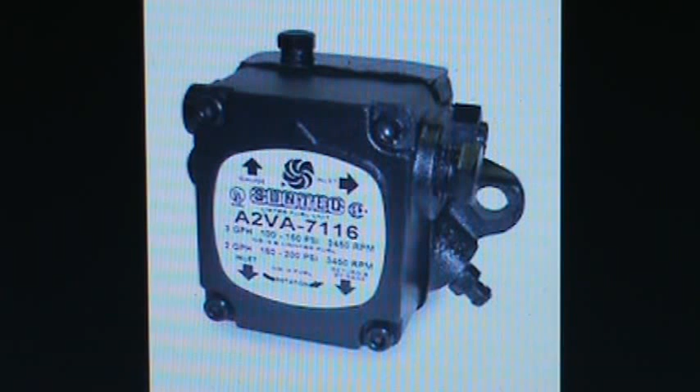This video is intended for advanced users. We will discuss controls, fuel pumps, service practices, troubleshooting, zone controls. Today I want to talk and start on fuel pumps.

This particular pump here is a Suntec A2VA 7116. It's probably the most common single stage fuel pump that you'll run into. The newer generation is the clean cut with the solenoid on top. We'll get into that one a little later. But this one here I want to go over because it's very, very common.

There is a strainer inside. This is the strainer cover that you're looking at here. There's 4 bolts, one on each corner, of course, and the strainer should be replaced at least once a year, or taken out and serviced, cleaned, new gasket installed.

Okay, so I opened up to the spec page. I want to thank Suntec Fuel Pumps. This is their manual for this particular pump, and I got this right off the line. This is their PDF file for their pump, A2VA 7116 pump.

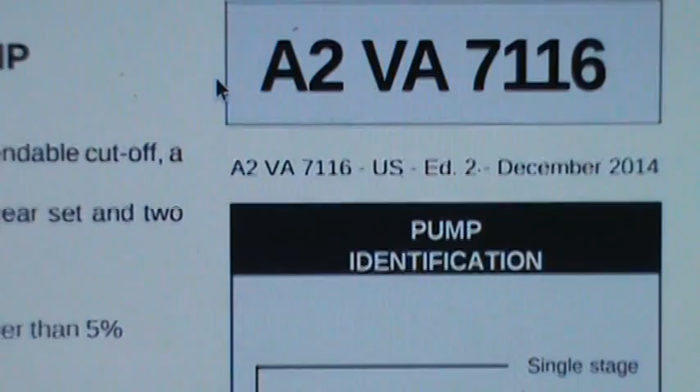Now, first thing I want to do is the pump identification. If we scroll down here and we look, we've got the pump identification, and there's the A2VA. So the first letter A, that signifies it's a single stage pump. If it was a 2-stage pump, there would be the letter B there. So A is single, B is 2-stage.

Motor RPM 3450, very important because there's 1725 RPM burner motors. Old ones, you don't see them anymore, but you want to make sure you get the proper speed, or the valve will not open inside, and with the older pumps, you won't get any fuel coming out of them. Is one scenario. You just can't run at the wrong speed.

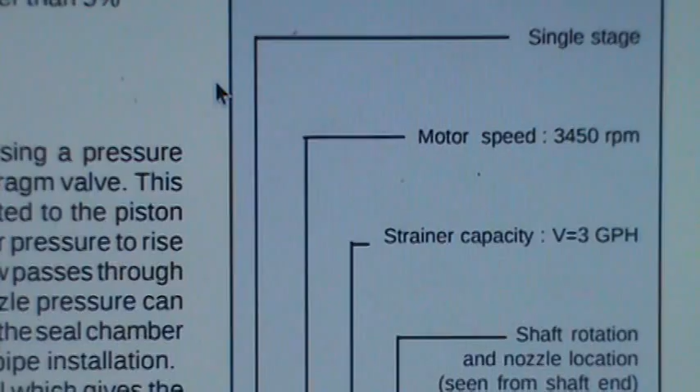That's kind of obvious. All right, then the strainer capacity, that's signified by the V. So strainer capacity V equals 3 gallons per hour. So on this particular pump, the strainer capacity is 3 GPH, 3 gallons per hour. So the maximum nozzle that you can run in that at 100 psi is 3 gallons. That would be your maximum. And I really don't recommend maxing out a fuel pump.

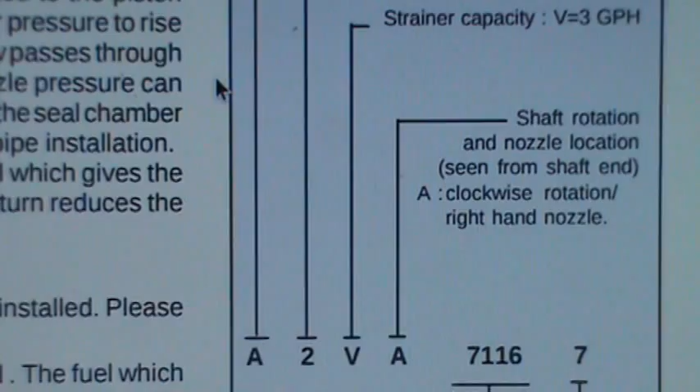The last A there, if you see, shaft rotation and nozzle location seen from shaft end. So A would mean a clockwise rotation, right hand nozzle. Whenever you're looking, this is kind of elementary, but just in case you don't know that out here, whenever you're looking at motors, electrical motors, or you're looking at fuel pumps, and you're trying to determine the shaft rotation, you always look at the shaft end first.

So if you hold the motor up in your hand or the fuel pump, look at the shaft. If the shaft turns right, then it's a clockwise rotation, and obviously if it turns left, it would be a counterclockwise rotation. So motors and pumps always go by the shaft end.

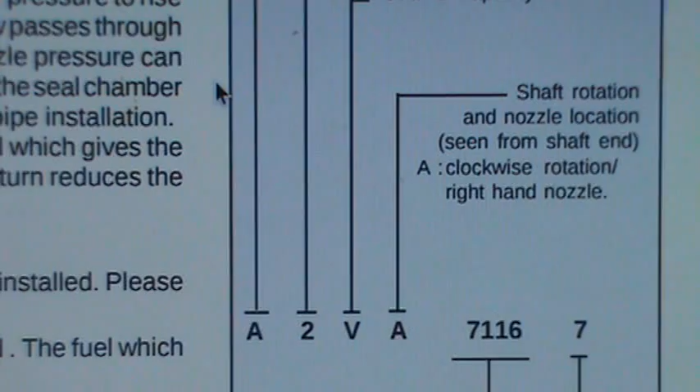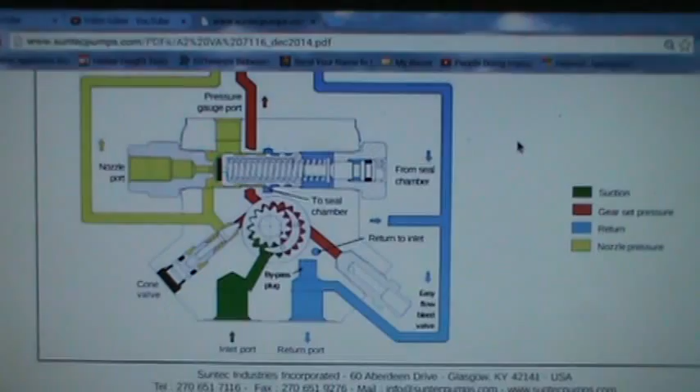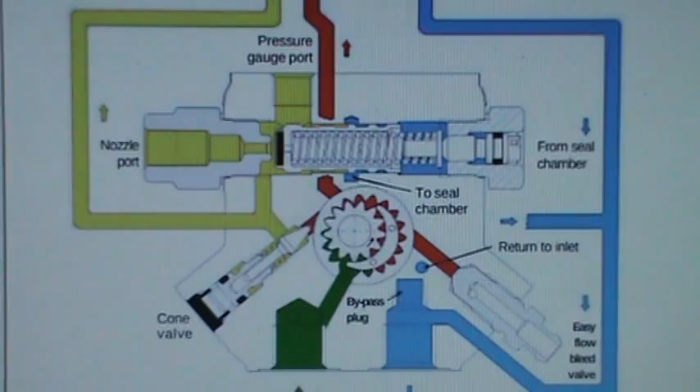Now let me zoom out here a little bit so we can see this diagram. And what this is, is the internal workings of the fuel pump. And I'll zoom this in. Again, this is a diagram, a PDF drawing from Suntec, their website. So they drew this drawing, I did not. If I can get it all in here.

Okay, I know this is really kind of hard to see, but let me go over the scale a little bit with you. Over here in the key section, the green is the suction. The gear set pressure, so pressurized oil will be the red. The blue is the return going back to the tank, and the yellow is the nozzle pressure.

Alright, this is the internal working of this particular Suntec fuel pump, the single stage. Inside you have a gear set and an inlet port. The green's inlet, the blue is the return port. You have a gear set that pulls in, creates a low pressure, pulls in fuel, builds that pressure up to 100 psi, 140 psi, which is common now.

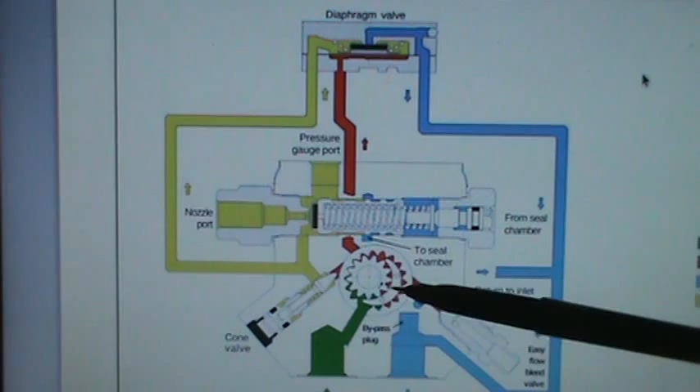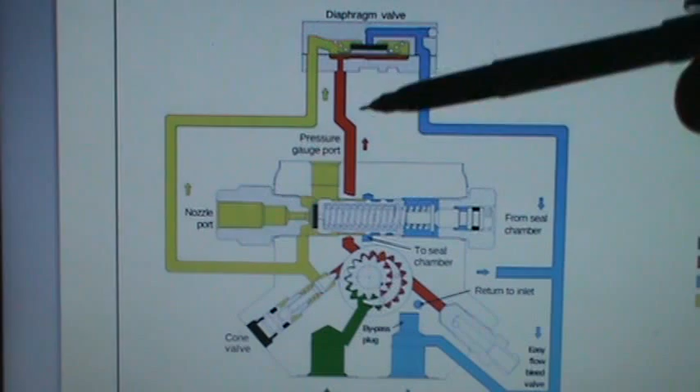You have cone valves inside. You have some diaphragms up at the top here. You have the nozzle port here. This is where your nozzle connection would be. Then you have, over here, your bleed valve, which is right here. We have a bleed valve over here, which is your purge valve, which is also tied in to the return port from up here. And you have a way to set the pump pressure with a spring.

So when the fuel oil overcomes the pressure of the spring, it allows it to flow out through the nozzle. There's a fuel cutoff valve inside the fuel pump, and its design and purpose is for those few split seconds, however long it is, for the pump to get up to speed and for the pump to wind down.

When the motor starts, it doesn't start instantaneously. In our mind, in our lifetime frame, it does, but if we slow that down, we can see that it takes time. The motor takes time to get up to speed, and vice versa when it's shutting down.

At those two points, if we did not have some way to shut off the oil flow, we'd have lower pressures, bad atomization if any—more like big droplets squirting like a squirt gun into the fuel. It would not mix with enough air. It would be a very rich condition, and you'd get a lot of sooting.

So to prevent that, in the older pumps they have what's called a fuel cutoff. It's basically a valve where the pump has to come up to pressure, or in some older pumps up to speed, before this valve would open and allow the fuel oil to be sprayed into the combustion chamber out through the nozzle.

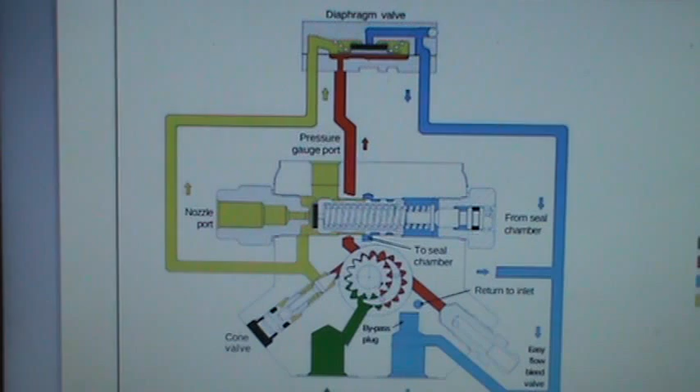If this cutoff is bad, you get what I mentioned before—this winding down, this squirt gun action, which creates a lot of soot, a lot of smoke, and plugs things up. There's a test you can do with your fuel gauges, and I'll show you how to do that later when we put the gauges on, to determine if the cutoff is good or bad.

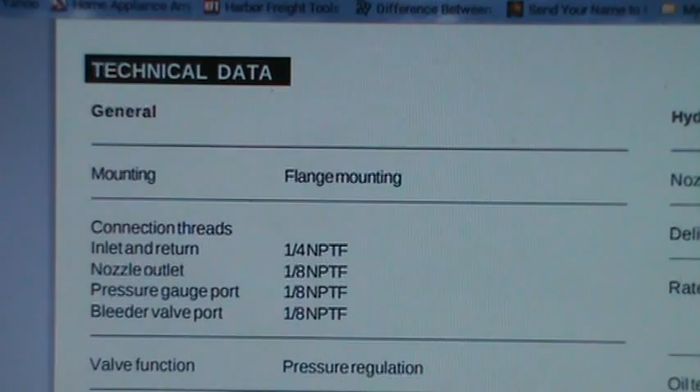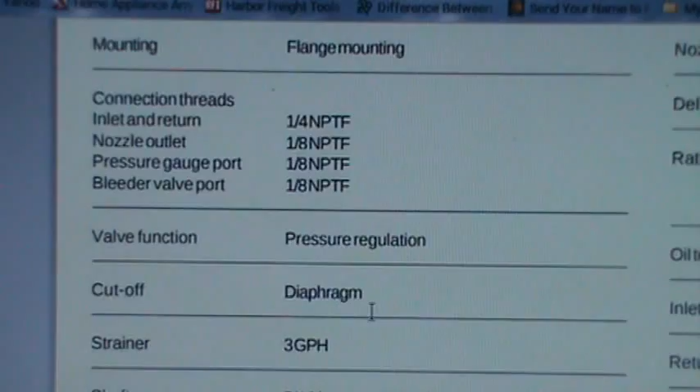Just real quickly, some of the technical data: here's the pipe sizing, the nozzle sizing, which we won't really get into—good 1/4 inch threads, 1/8 inch threads, pipe threads. The strainer, as I was telling you, is a 3-gallon strainer, you can see right here. The shaft is 5/16. This is just the instruction manual that comes with it.

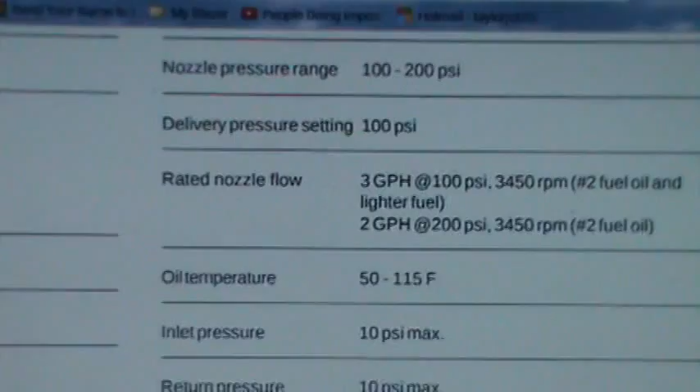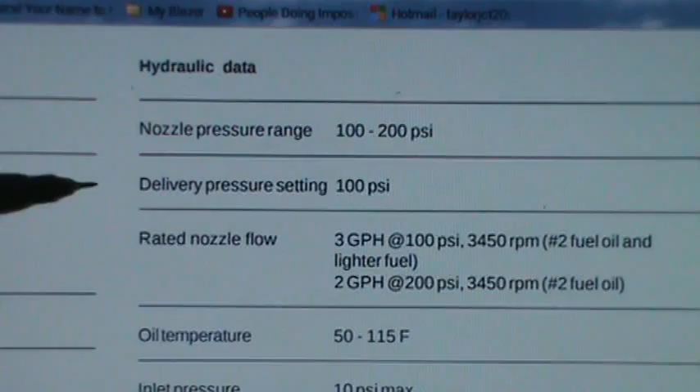If we look over on this side, I'll put my camera over so you can see, and we'll scroll down. Okay, the nozzle pressure in this range for this particular pump is between 100 and 200 psi. You can see right up at the top—the delivery pressure is 100 psi, so this pump is set from the factory at 100 psi.

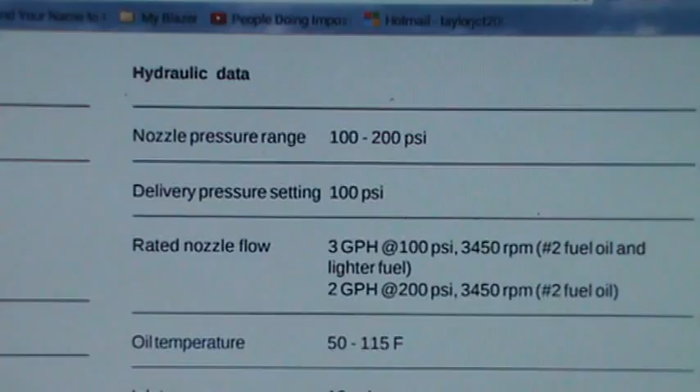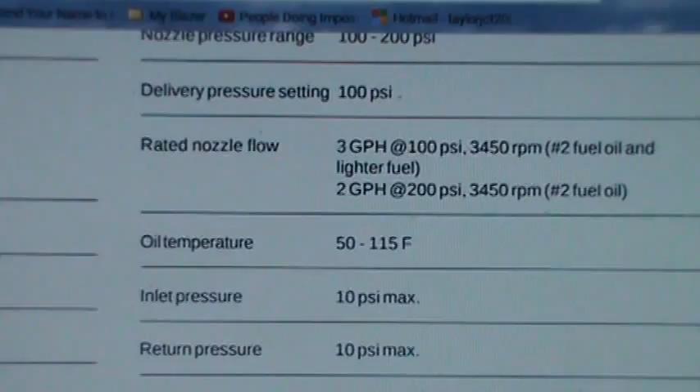This is your flow rate: 3 gallons per hour at 100 psi at 3450 RPM with number 2 fuel oil. If you increase your pump pressure to 200, your gallons per hour drops down to 2. You have your oil temperature there, minimum to max, 50 to 115 degrees Fahrenheit.

Now inlet pressure is 10 psi max, return pressure is 10 psi max. The reason for that, and per code too, is you're not supposed to install any type of valves on the return lines. You see it all the time—there's check valves. Sometimes if you don't, you get a free flow, and when you take your cover off, oil just pours in, and that's not a good thing either.

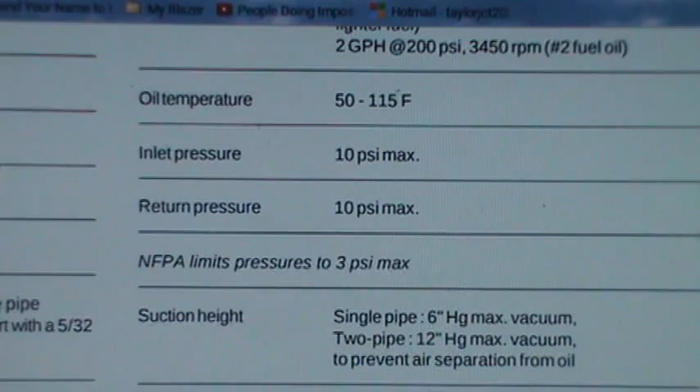The problem is that if the check valve or the return line should plug up on a 2-pipe system, or you leave a valve off—say a Firematic, you work on it, you forgot to open it after you serviced it—the inlet pressure here is only 10 psi, and you have a shaft seal in there. At that pressure, or slightly above it, the oil will leak out of that shaft seal into the burner housing, and then the fan will pick it up and blow it everywhere, or it'll leak all onto the floor.

In some cases, if the oil tank is outside above ground and the burner is actually below the oil tank, it's good to put an oil safety valve, or OSV, installed inline right at the burner. The reason for that is the weight of the oil itself cannot flow down through into the pipe, so if you have a busted line, leaky valve, or leaky shaft seal, the oil wouldn't gravity feed down.

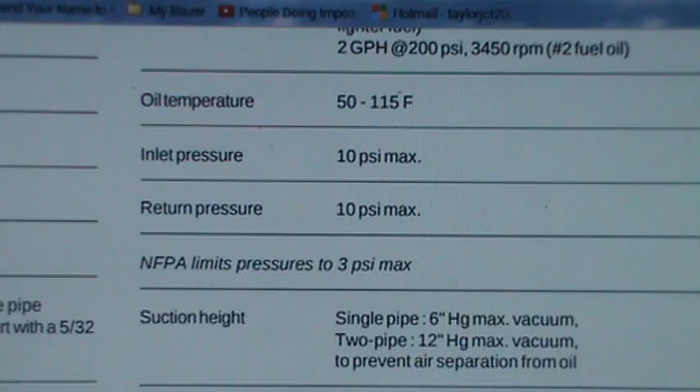It takes a slight suction from the fuel pump to open this valve to allow the oil to flow. It's an OSV valve, so anywhere the tank puts pressure on the burner from the fuel oil, you should always have an oil safety valve.

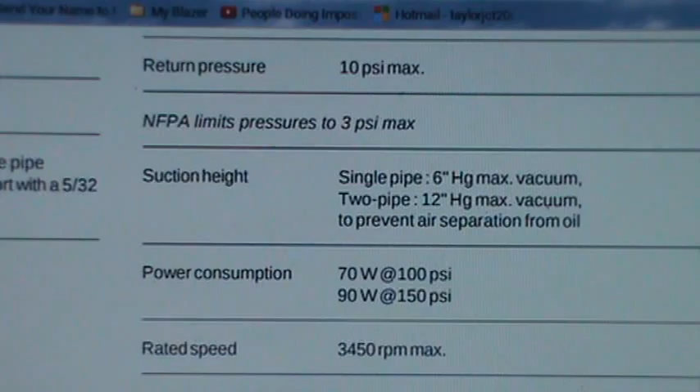Now, single pipe suction height, here we go. Very important: single pipe, 6 inches of vacuum. Two pipe system, 12 inches of vacuum, to prevent air separation from oil.

That's called cavitation. Basically, cavitation is when there are small microscopic droplets of air in the fuel oil, in liquids, from just the air pressure alone here on the surface of the earth. So when we start putting those liquids under a vacuum, that air expands tremendously and wants to come out. If you pull too hard, say roughly 15 inches of vacuum...

You're going to start cavitating. You're pulling that oil under a vacuum, and the air molecules inside those little voids are going to expand, and it looks like you're pulling the oil apart. If you're not trained for this, it looks like you've got a leaky oil system somewhere and you're pulling air in through the supply line to the burner. But in fact, you're actually pulling apart the air that's trapped inside the oil, and that's because there's too much vacuum. A plugged oil line, plugged filter, things like that can cause that.

So we'll get into that. I'll show you that in a video when we do a live demonstration.

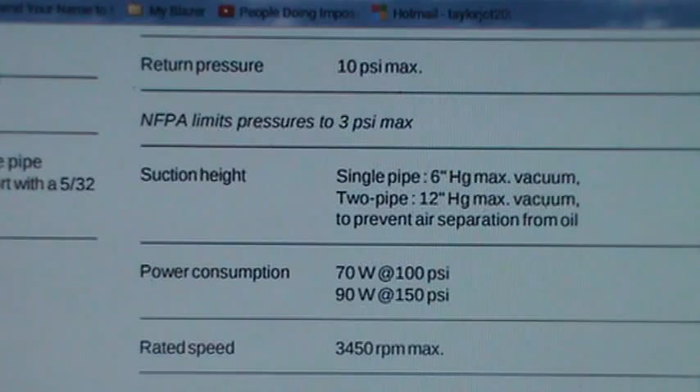I mentioned this pump before. This is the Suntec A2VA 3006. What they've done is eliminate the fuel cutoff inside the fuel pump and gone with an electrical solenoid that's powered by the primary control. By doing that, they can do pre-purge and post-purge, and actually run the unit without spraying any fuel. There are a lot of advantages to that. It's pretty much a single stage pump, just like the previous pump, but with this feature added. Let me go to the specs on this.

Here is the online service manual, or instruction manual, for model A3000 and B4000, the single stage and two-stage fuel units that you can get from Suntec online.

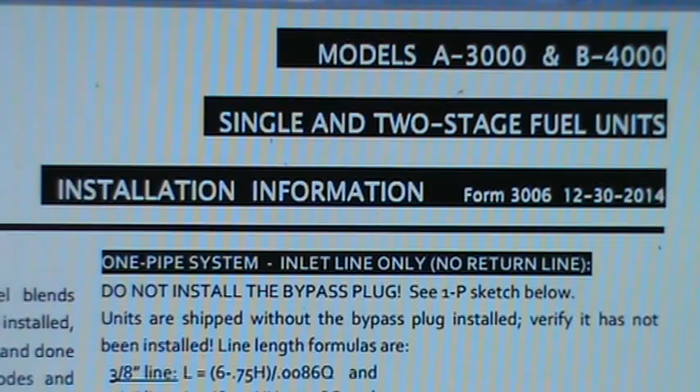Here in the instructions they give you the formula to figure out the length of lines. They say L is the length, H is the head, and Q is the firing rate. They give you the formulas to size the oil lines in the fuel pump properly. In the notes, it says elbows, valves, fittings, and filters will reduce line length because they add restriction.

The very last note is kind of interesting: it is recommended to avoid 3/8 lines where feasible. That's interesting, I understand that — obviously you can get more oil supply under less vacuum with a larger line, but 3/8 has been standard for many years.

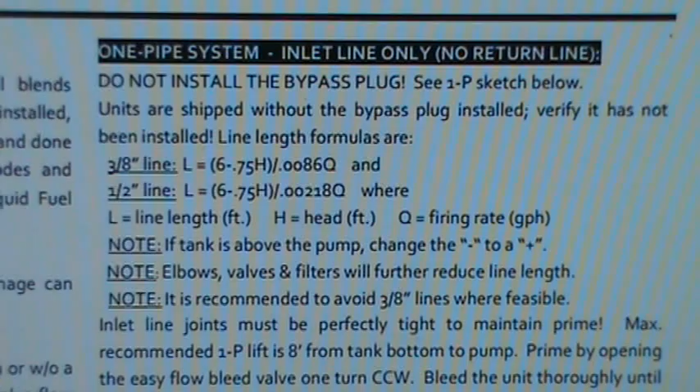If you read here, the inlet line joints must be... let me pull the camera down a little so you can see. It says the inlet line joints must be perfectly tight to maintain prime — that's obvious. Maximum recommended lift is 8 feet from tank bottom to pump.

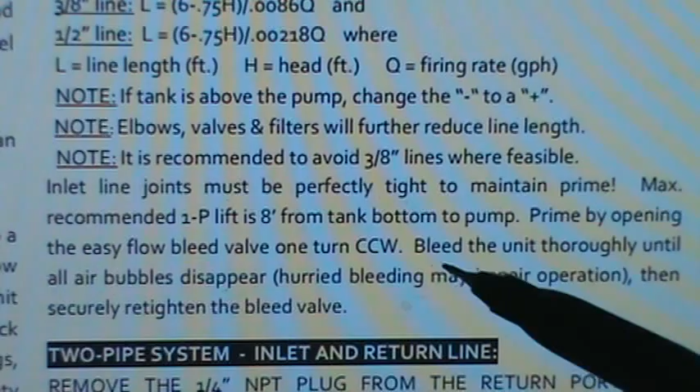Good information to remember: maximum lift, this is for a single stage, one pipe, no return line — maximum lift is 8 feet from tank bottom to pump. Prime by opening the bleeder, bleed the unit until you get the air bubbles out.

All fuel units come through with a bypass plug not installed — that's for a single pipe system. Single pipe system, you have to purge it. If air gets into the pump, it will just stop pumping. You have to manually bleed it, like brakes on a truck. Two pipe system, one of the advantages is that it will self-prime.

As long as it will prime and fire during the time limit of the safety before it locks out. That's why on a lot of new controls you'll see it retry, because they'll give it a second try for ignition. So by that time, hopefully, if it's a long run or troublesome, you might get the oil to the burner and have it fire and not lock out, so you won't lose your heat.

Two pipe system, you need a bypass plug installed inside the fuel pump. These instructions tell you how to do that — you must put it in the return port on the bottom of the fuel pump, which I'll show you later. There's a plug that you must take out, and a small Allen screw plug, in this case a 1/16 bypass plug, with a 5/32 Allen wrench head. You stick that inside, tighten it down, and that blocks off the bypass port internally inside the pump. I'll go over that in detail a little later.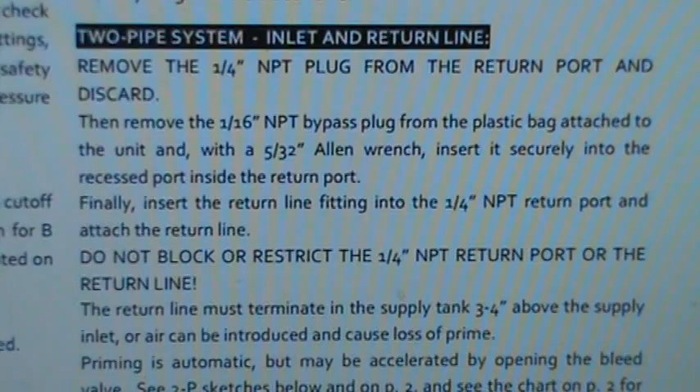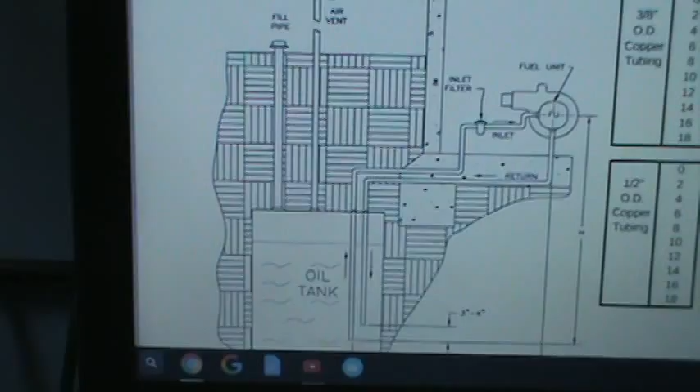Okay, here someone took the time to draw us a nice drawing, and this is in the instructions. If you look up there, it's a two pipe hookup, inside or outside fuel tank, fuel unit above tank — in other words, a standard in-ground installation, fuel unit installation. So here you see the tank, your fill pipe, your vent pipe, your two lines. And if you notice here on the schematic, let me get down and zoom in a little bit.

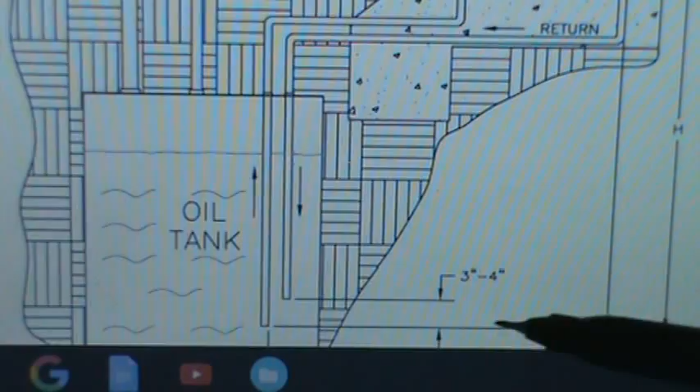If you see right here, that 3 to 4 inches? Right there. What that means is they want the supply line, if you follow it down from the burner, which is the outside one, to be 3 to 4 inches longer than the return line. See the arrows right here? So supply is longer by 3 to 4 inches. That's to help prevent air bubbles getting caught and getting in, and losing your prime in your burner. That's what that's for, it tells you that in the instructions.

Okay, let's look at this chart first. This is the 3/8 copper tubing, the inlet tubing size, so 3/8 copper coming in. This is your lift and height, so your vertical lift, you pick however many feet that might be. Then if you look up here, this is a single pump, Model A, single stage.

Over here's two stage, Model B. Here's your two different RPMs, the 1725 and 3450 pumps. Then you have the gear set, which is either 3 gallons per hour or the 7 gallon per hour pump. So you have to find what column we fall in. In a typical residential setup, you order a boiler, a 3-section boiler, your standard boiler that you buy at your supply house, it's going to have a single stage, 3 gallon per hour pump, and it's going to be a 3450 nowadays. You won't find 1725 pretty much, those are just old burners. You won't find them anymore unless it's old burners. To my knowledge, nobody makes them any longer.

So we're at a single stage pump. We're in our basement downstairs. We're at 3450 RPM, and we're also a 3 gallon gear set. So with this chart, and we're running 3/8 oil lines, we're going to be using this chart right here. See how that works? All right, and then our total lift.

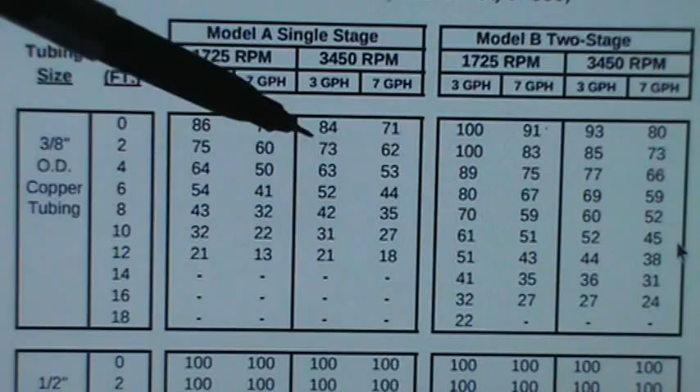Then we go over to our section where our pump is, 3450, 3 gallon, and we go down to 10, that column intersects there. It says our maximum line there and back is 31 feet. So that's only 15 feet to the tank and back again, if you're lifting 10 feet in the air.

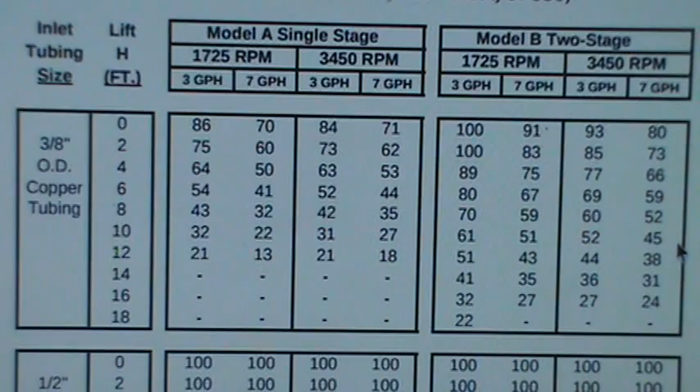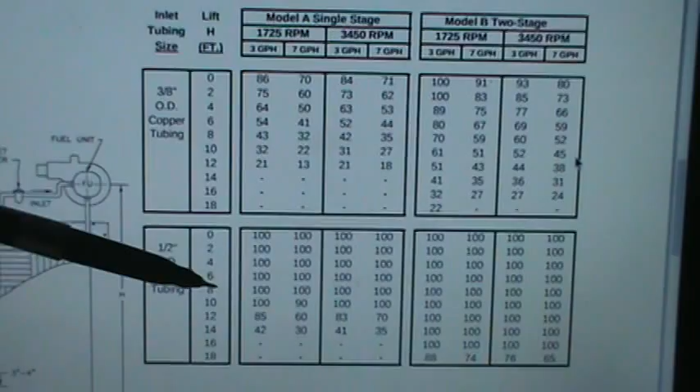Now you can put that into perspective with some of the installations that you've run into. Now I kind of zoomed out, and I know it's hard to see, but over here it's kind of the same chart that we just looked at, but for 1/2 inch copper tubing. So here's your feet, just like the other ones. But if you notice over here, most of these are hundreds, almost all of them, until you get way down here, until you're pulling a really, really high lift, because 12 inches of vacuum, you're getting really, really high in vacuum.

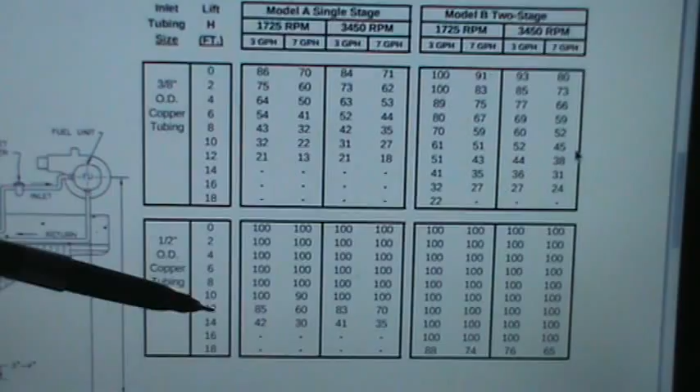Because basically, on a single pipe system, you only want to pull about 6 inches of vacuum on a single pipe, single stage pump. 6 inches is about maximum. A 2-pipe system with the same pump, they recommend about a maximum of 12 inches of vacuum. But if you increase to a 1/2 inch line, look at the line lengths, the difference.

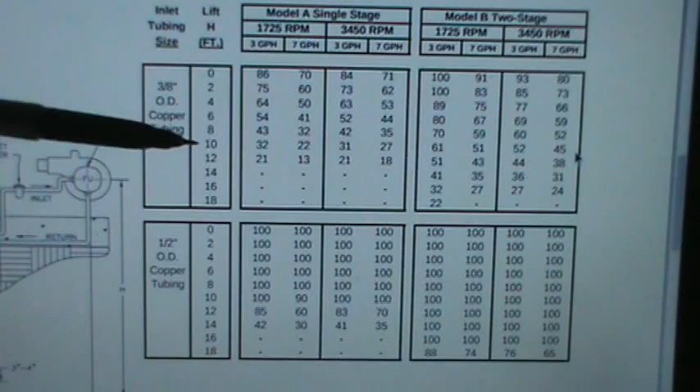For instance, say we're coming out, do the same scenario. We got 10 feet of vertical lift. We go over to our pump that we were using, maximum is 31 feet, remember? So now the same scenario, 10 feet here, same pump, we're at 100 feet now. So what a difference, just by increasing that from 3/8 to 1/2 inch oil line, makes a huge difference.

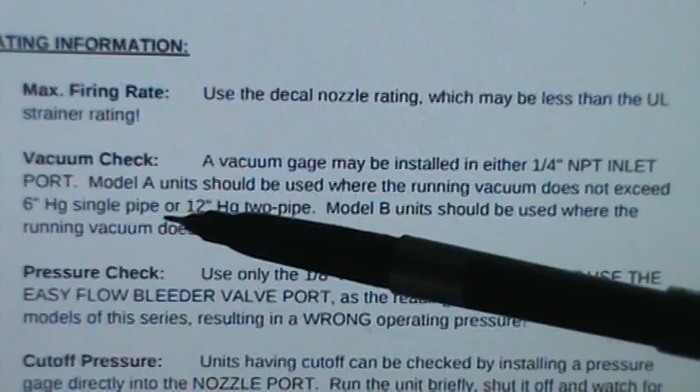To elaborate a little bit on what I just said about the rule of thumb on vacuums and the maximum amount of vacuum, here it says in the operating instructions under vacuum check: a vacuum gauge may be installed in either the 1/4 inch NPT inlet port, which is another inlet on the bottom of the pump, you can put a vacuum gauge there. Model A units, which are the single stage units we've been talking about, should be used where the running vacuum does not exceed 6 inches single pipe, or 12 inches 2-pipe.

Model B units, 2-stage units, should be used where the running vacuum does not exceed 17 inches. All right, there's our guideline.

That is so important. So when we go to that service call where a customer complains the oil burner will not continue to run and everything tests out fine, the ignition transformer looks great, the primary control looks great, maybe you've already changed them because you weren't sure - all you've got to do is throw a vacuum test on that and see what you're pulling for a vacuum.

If it's a single stage pump, and know what your pump is, of course, and you're pulling more or greater than 6 inches of vacuum, again account for age of the pump as well. An older pump won't be as good, it'll be worn out some. But if you're pulling 6 inches or greater, that could be a problem right there. I'm not saying it is your problem, but it very well could be.

Now I have seen single stage pumps, that one single pipe, that would pull 12 inches of vacuum, and they did it for years - they're very reliable pumps. It depends upon the integrity of the pump, how it's been treated over the course of the year, and how well it's been maintained. If it's never run dry and overheated, and you've never had contaminants in the oil to eat away at it, then that pump will last a long time. Assuming water hasn't gotten to it - there's so many variables. Water will destroy a pump, air will destroy a pump, running it dry trying to prime it for long periods of time will destroy it, because it gets its lubrication from the fuel oil itself, and that's what keeps it cool.

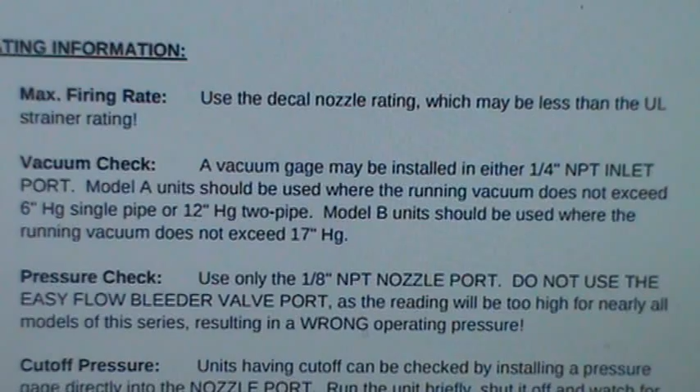The pressure check: it says here to use only the 1/8 inch national pipe thread nozzle port. So it's only telling you to use the nozzle port to do a pressure test. Do not use the easy flow bleeder valve port. Some guys want to use the bleeder valve, which I was taught many years ago, but this is the instructions from the manufacturer - you cannot argue with that. It says in capital letters, do not use the easy flow bleeder valve port, as the readings will be too high for nearly all models of this series, resulting in a wrong operating pressure.

That doesn't tell you it will not move the needle - it will, but it will tell you it will not be accurate. So you have to go off the nozzle port.

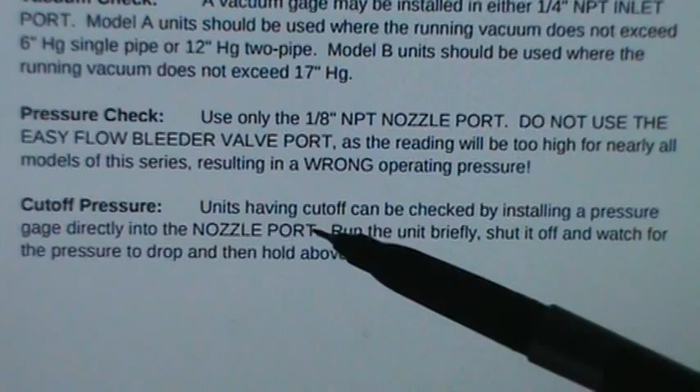Also down here, to check the fuel cutoff, it says units having cutoff - which are the units that do not have the electronic solenoid on top - can be checked by installing a pressure gauge directly into the nozzle port. Plug off the nozzle port, run the unit briefly, shut it off, and watch for the pressure to drop, and then hold above 0.

Now there's some gauges, which I'm going to show you in just a few minutes, that you can put on that has a valve you can turn on and off to check the fuel cutoff pressure. So I just want to run that past you real quick.

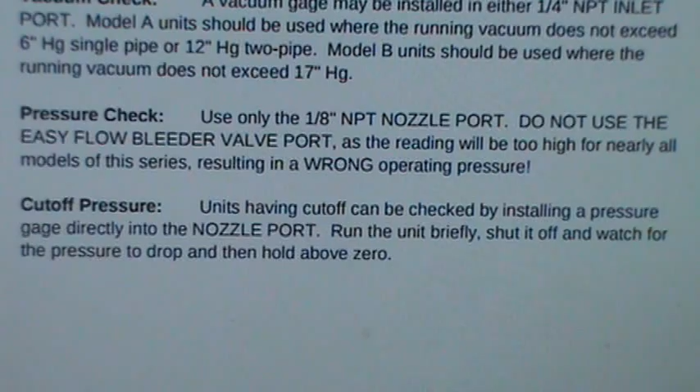One last thing I want to show you is the pump ID system.

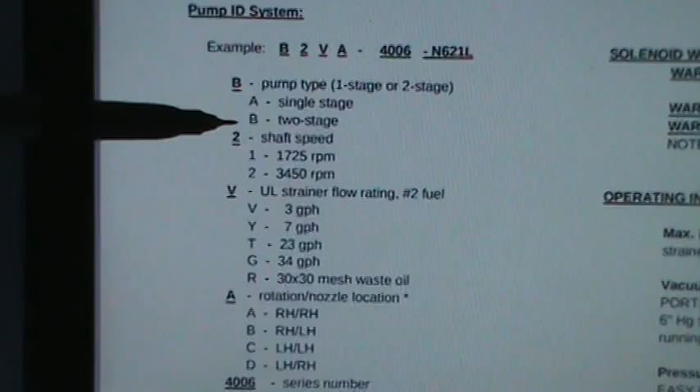Here we have, this particular is a B, so a B would be a two-stage pump cycle. A, single stage. If the first letter is A, single stage; B, two-stage - it's pretty basic. The next digit, two, means it was a 3450 RPM or 1725. That's what this digit is. The third letter, V, is 3 gallon - this is the gear set.

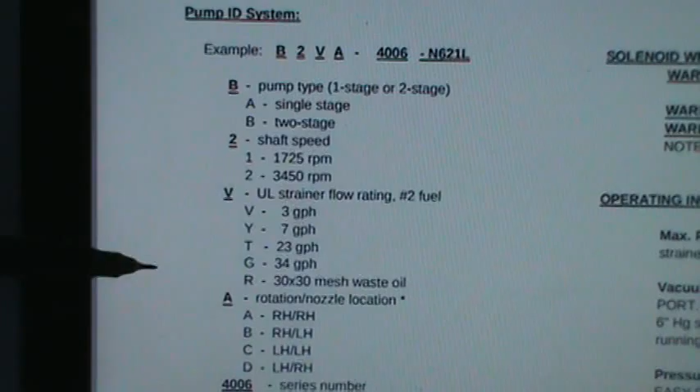Notice you can get pumps all the way from 3 gallon, which would be your standard residential, all the way up through 34 gallons per hour. And possibly you go into other types, which I know you can - you go up into other types of pumps and you can get ridiculously high. But in this series, it will go up to 34 gallons per hour.

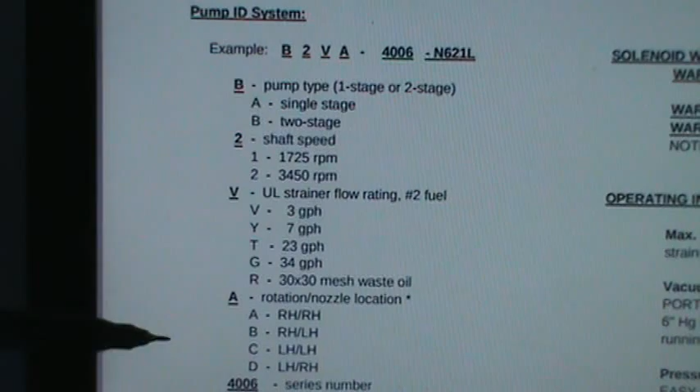And then, of course, your rotation - which way it's spinning. If the pump's on the right side or left side, or which side you want your nozzle port on, that's what the last letter signifies.

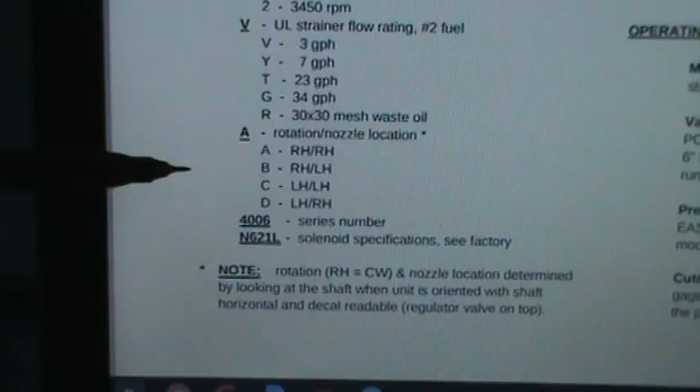And then the series number - make sure you can see that. Yeah, the series number is right here, the 4006, is just a series number. And then the solenoid specifications is that last number on the very, very end, which is up here, that very last number.

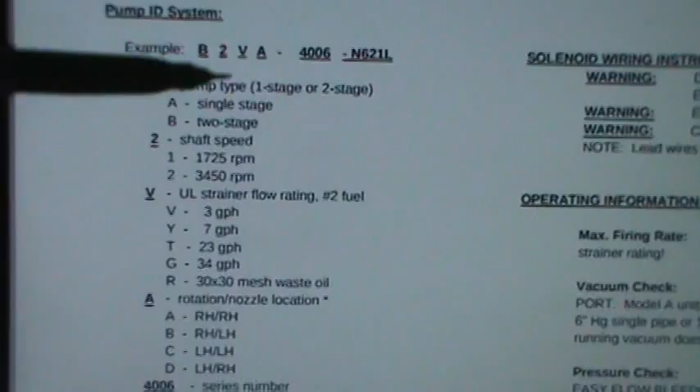So I just wanted to show you that. I think I bored you enough. Thank you for really sticking with me.

Now, if you want, we're going to go downstairs. We're going to hook up some gauges, and we're going to test this and see what cavitation looks like, what pressures and vacuums look like, and see what's going on downstairs. Hope you stick around.